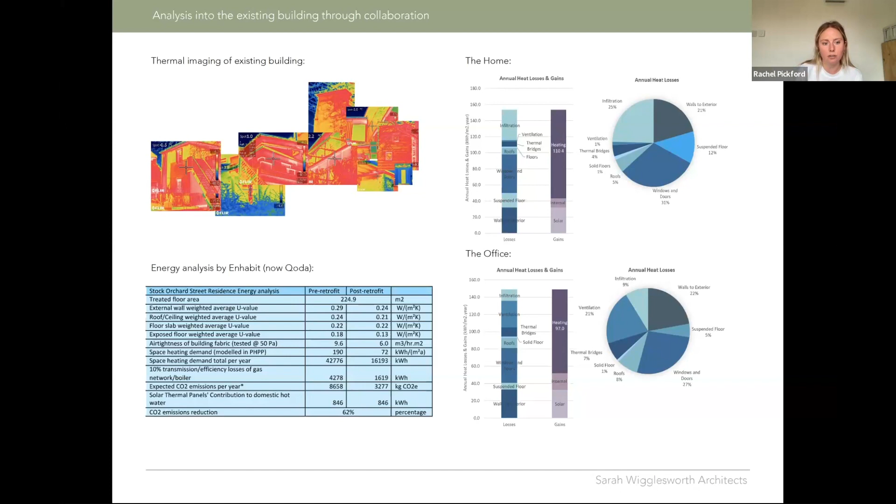And this analysis culminated in a pre-retrofit and post-retrofit performance analysis, which was then culminated into this table here, which sought to look at the different measures which could be applied and how they would impact energy, comfort, and also cost. This table enabled Sarah and Jeremy to make decisions on what measures to be implemented to work with their budgets.

This sketch here shows the different eco-improvement measures which were applied externally to the building. They sought to improve airtightness, reduce thermal bridging, and improve ventilation, as well as improving solar control. So things like shading were installed to the south-west-facing windows, as well as external blinds were installed to these windows as well.

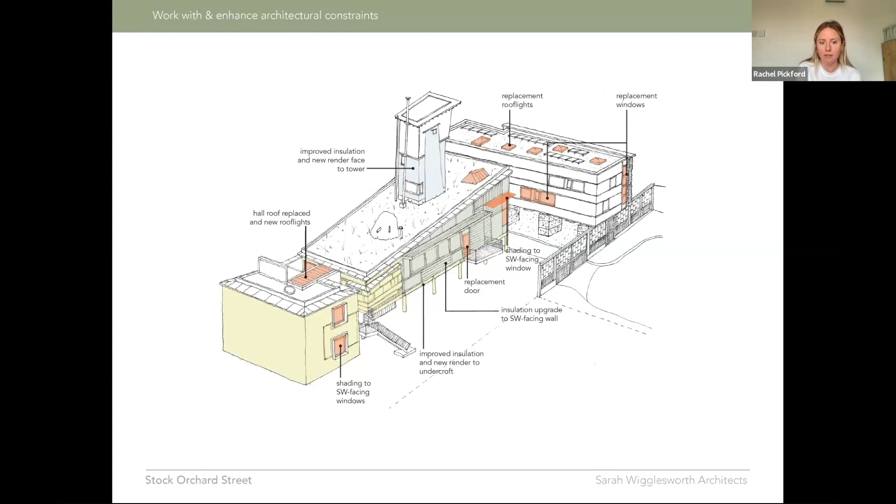And then the thermal performance was improved through incorporating things like insulation to the soffit of the ground floor living space, as well as replacing the roof lights to this link. This link, although it's a very small area of the house, through the analysis, we found that it was losing 8% of the overall heating through this space.

So I'm going to look at two key details. The first being the undercroft soffit. You can see from the thermal imaging that the existing beams and columns were having a lot of heat loss, and they were cold bridges in the existing design. Historically, before the retrofit, there was only a slim zone of insulation below the beams, and the columns themselves are moment columns, so directly attached to the beams themselves.

This meant we were slightly limited in how we could improve the thermal performance, but we sought to install a layer of insulation below the soffit, which worked both with the existing architectural character of this banding to the top of the soffit, but it also allowed us to think of ways in which we could improve the performance of that undercroft space, which acts both as a garden store for Sarah and Jeremy, but also as our office bike store. So we sought to incorporate lighting within the space.

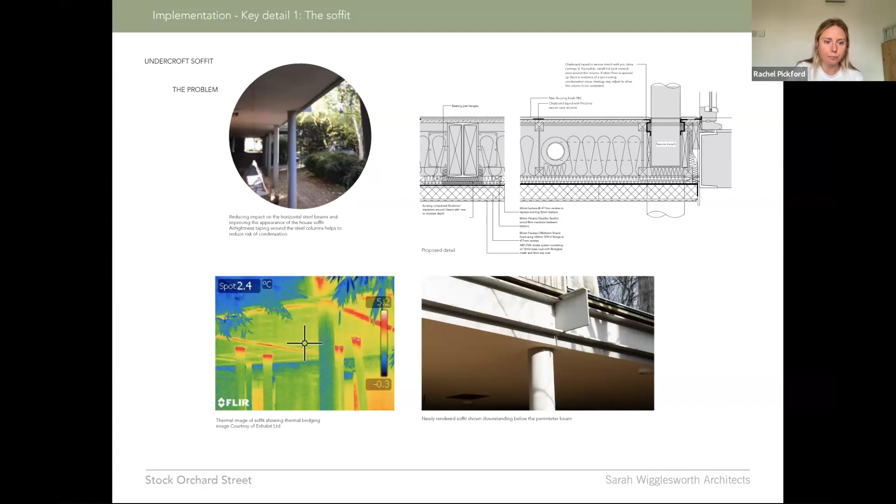The second key detail that I'm going to look at is the hallway link. So as mentioned on the diagram, this area was losing around 8% of the overall heating, and even though it's a small area, the thermal analysis showed that it was allowing a lot of heat to be emitted from the building.

This image to the left shows the existing link, and you can see that it's got a large polycarbonate roof light, and the original idea was this space was meant to be an in-between greenhouse space that was lit by a lot of natural light coming from above.

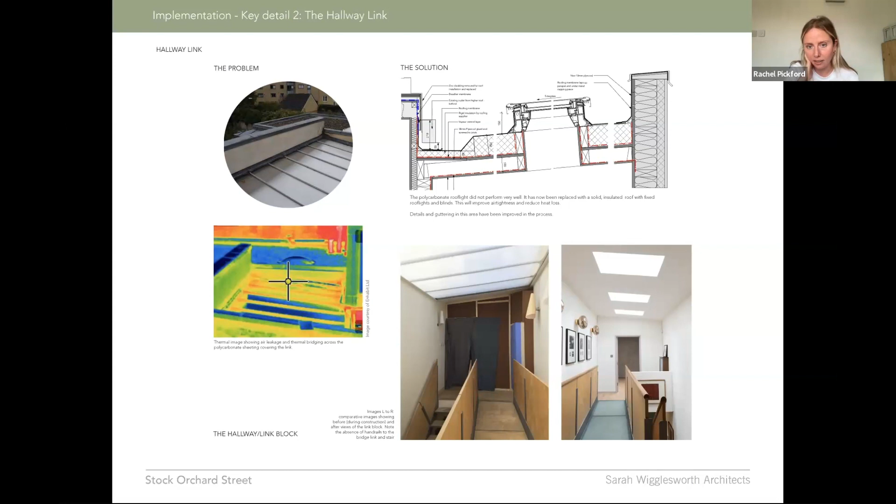As part of the retrofit process, we were keen to make sure that the existing character was maintained, and so we introduced roof lights in key areas, as well as replacing the floor with a glazed floor, which now enables the space to still be light-filled, while also enabling us to create a more thermally robust detail through insulating up around the roof light and also installing a very airtight line around these roof lights as well.

As well as the eco improvements that were installed on the scheme, we sought to push beyond the brief and provide a holistic retrofit. So we took the opportunity to create an environment that would enable Sarah and Jeremy to age well in place as well. And this really focused on the health and well-being of the occupants.

Key measures were implemented, such as installing handrails to the guarding around the stair. We also looked at the kitchen and sought to move the oven up so that there was no need to bend down to use that. At ground floor, a second kitchen was installed, which would enable a carer to stay in the property if ever needed and have access to their own facilities.

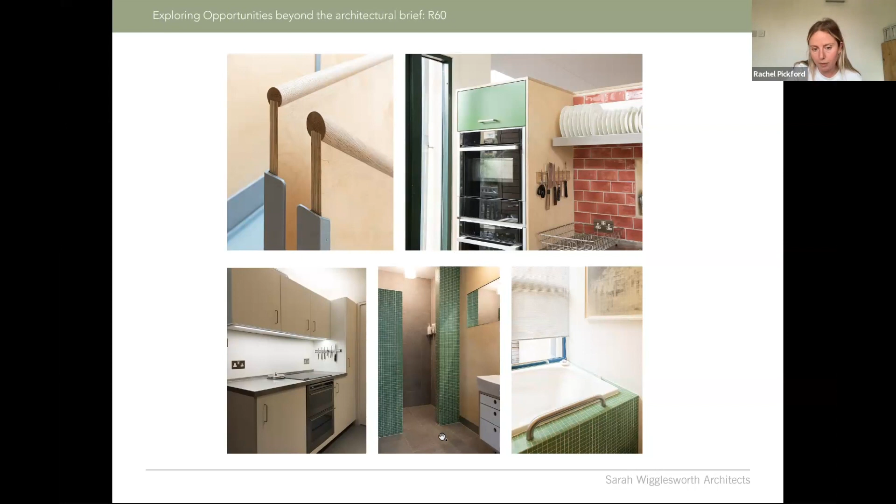And then the bathrooms were addressed as well. So the shower was looked at to provide a flush, easy access shower, as well as grab rails being installed around the bath.

So how have we applied the whole house retrofit approach to our projects at scale? This page shows some images of existing photos from our service family accommodation pilot retrofit. The pilot retrofit looks initially at 9 homes, which these photos show. But the intention is that as it's a pilot scheme, it will be rolled out around the wider garrison.

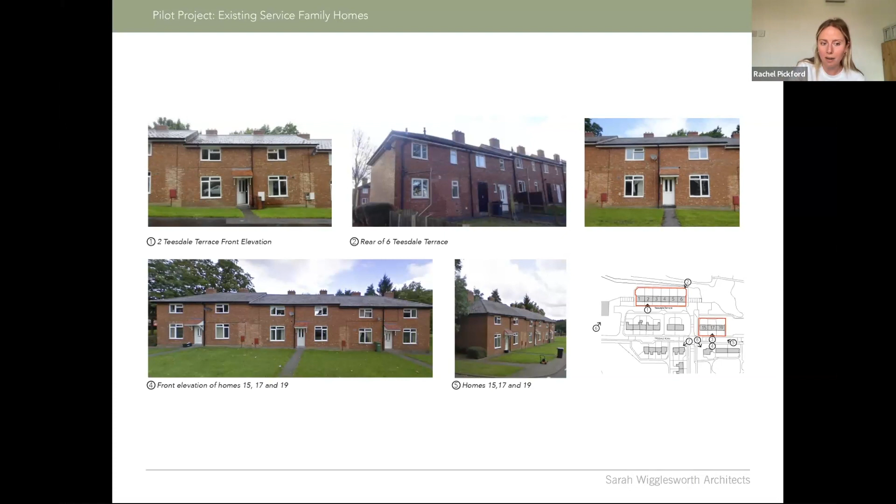The homes themselves are quite simple 2-story dwellings, but you can see from the photos that there's some patchwork brickwork, and that's because previously the homes were divided in 2 and they've already undergone their own kind of historic retrofit of combining these previously 2 dwellings into 1 dwelling, and that meant that each of the homes have a constraint of a historic party wall within the centre of the property.

In a similar way to Stock Orchard Street, a key initial part of our design development was to work with Qoda to analyse the existing building, as well as conduct surveys to see how the existing buildings were performing. The image on the left-hand side is Qoda's analysis of the existing U values and performance of the building, and the right-hand side images are thermal imaging done of the property.

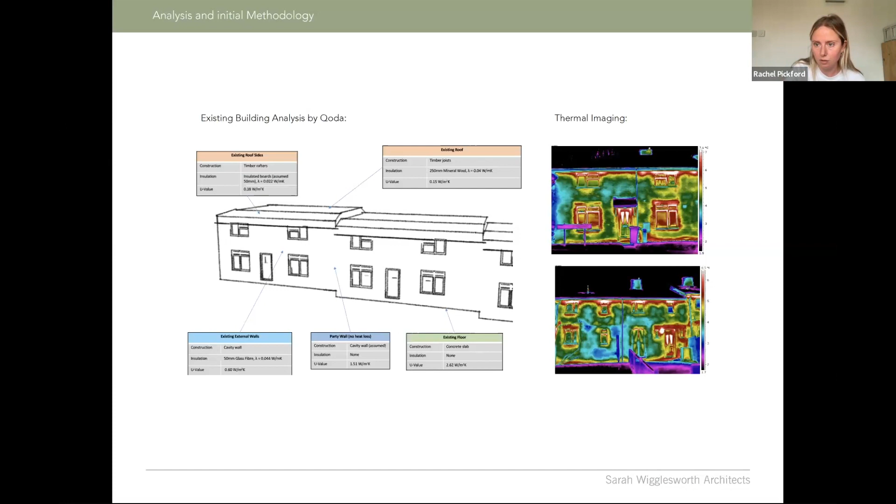And you can see that, as well as the elements where we would expect cold bridging to be happening, so around the windows, there's also cold spots happening in the existing cavity wall, which we have sought to address. So in a similar way to Stock Orchard Street, the analysis of the existing enabled us to table improvement analysis, which we worked with Qoda on.

There were different options put forward, and initially the brief sought to meet the PAS 2035 principles, but through the improvement analysis, the brief changed and the scheme now seeks to meet EnerPHit accreditation. That means there's quite a robust need to provide a really tight airtightness line, but as well as that, we're improving the thermal performance by installing a tea-cosy

insulating surround to the building, so insulating both the external walls and above the existing roof. New windows and doors are to be provided, and MVHR, air source heat pumps and PVs are looking to be included within the scheme.

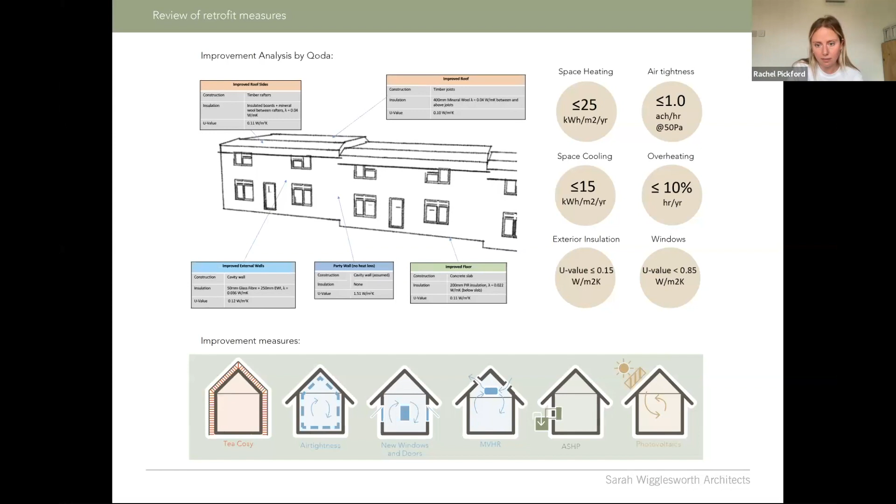As well as the fabric improvements, we worked with the client to get a brief in terms of how they wanted to improve the homes for the residents beyond the environmental improvements. And one thing that came out of our discussions was that the intention was not to just improve the homes so that they perform better, but address the fact that at the moment the row of terrace doesn't have any kind of individuality, and the client was keen for us to review the existing characters to provide different typologies of how each home could be externally insulated to provide a variation within a row of terrace.

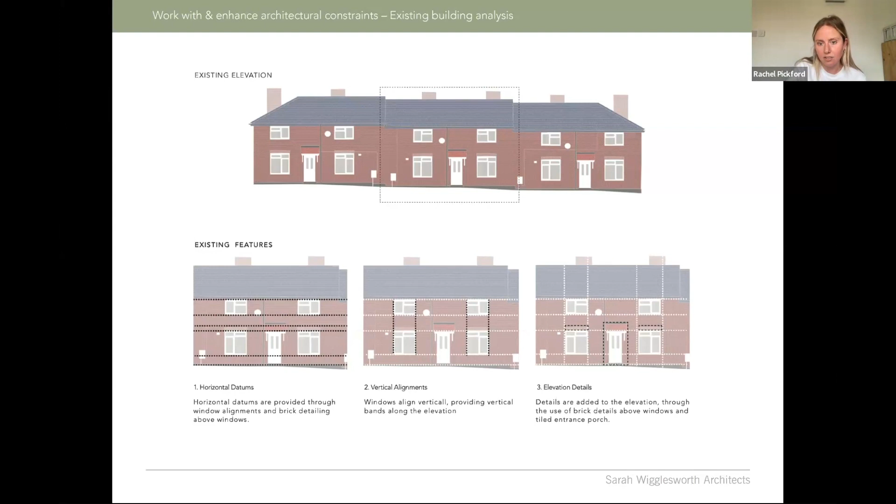So that led us to initially investigating the existing elevations and the design features that are present. So things like horizontal datums and vertical alignments, as well as elevational details on the homes.

We reviewed this, and then with the brief in mind to create different typologies, provided 3 different variants of how the elevation could be treated using a mixture of render and brickwork, as well as looking to replace the windows so that there's less mullions, but also play with the paneling below the windows to make them feel bigger in scale.

As well as the elevational treatments, we were keen to provide new entrances to each of the homes, which gave a sense of each home feeling individual, and that was done through incorporating canopy, and also each home now has their own kind of brick letterbox entrance area.

In developing the elevations, we also considered where the kit was going to be installed. These homes are temporarily occupied, and so there's a risk that any building occupants won't fully understand the kit that we're putting in. So we worked with the client to see where this could best be located, and it was agreed that it could be located in this rear external store, which would enable the client to come and maintain the MVHR without disrupting any residents.

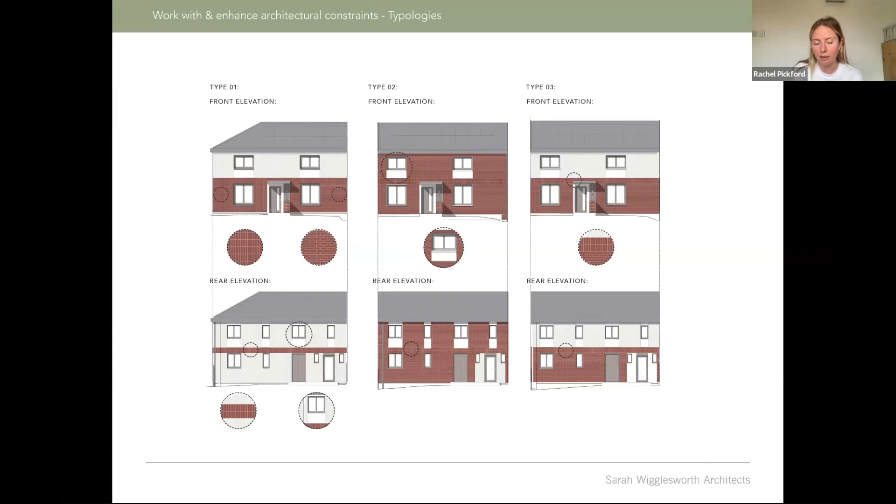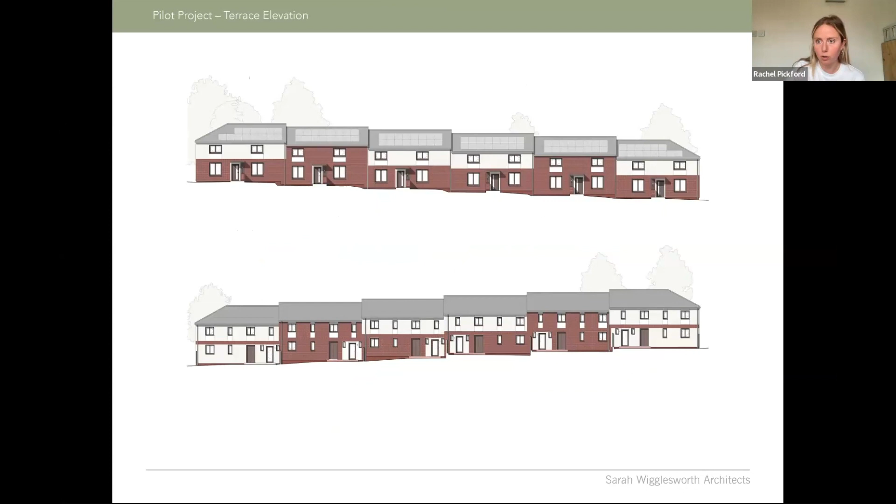And then these are just some elevational studies showing the different typologies applied along a row of terraces. One of the considerations with moving from PAS 2035 principles to ensuring the EnerPHit accreditation can be achieved was consideration on the airtightness line. And that meant, as well as considering where this sat, considering key junctions, and one of the key junctions was the roof.

And we worked with Qoda and also a QS to present options and different cost impacts. And although it may have allowed cost savings to insulate internally within the loft space, it was agreed to provide this tea-cosy effect by insulating above, as it reduces the complications of the airtightness line. It removes the need of tricky junctions around the existing joists, and the line can run up the existing brick wall and then above the existing joists and below where that new insulation line is sitting.

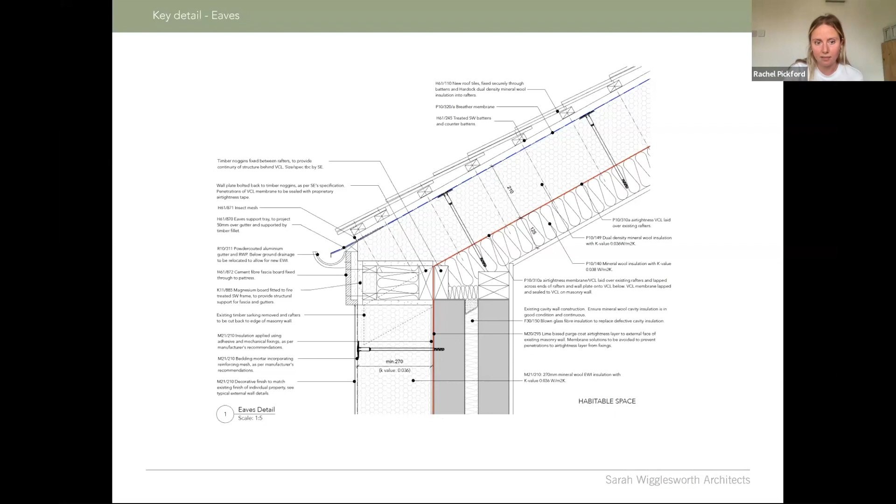It also meant that there was an easier solution around the party wall detail where you're stepping, as that line could run continuously along.

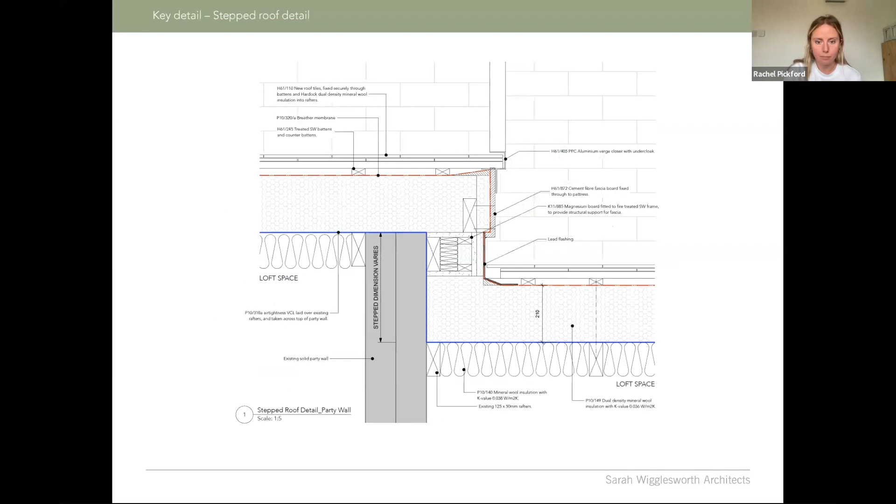So, as well as that pilot project, we've worked on other pilot projects where this was a decarbonisation project, and we looked at 50 homes in Warwick. In a similar way to Catterick, we sought to see where additional details could be used externally, where we're externally insulating the properties, to provide a better entrance area to each of the residents. We also worked with the client to see how MVHR could potentially be incorporated into the homes, but without the benefit of residents being able to leave, like the Catterick project.

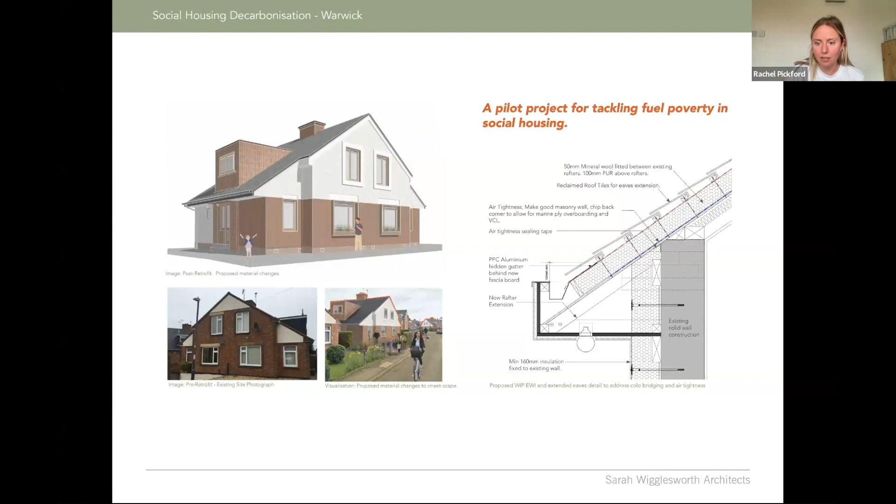And then the second project and last case study is the retrofit of artist studios. So it's not a residential retrofit, but it's a retrofit of artist studios in London. We worked with the client to see how the performance of the envelope could be improved to create warmer spaces for artists, but we also sought ways in which the proposal could work with the client's commercial business structure by providing additional artist spaces up at the roof.